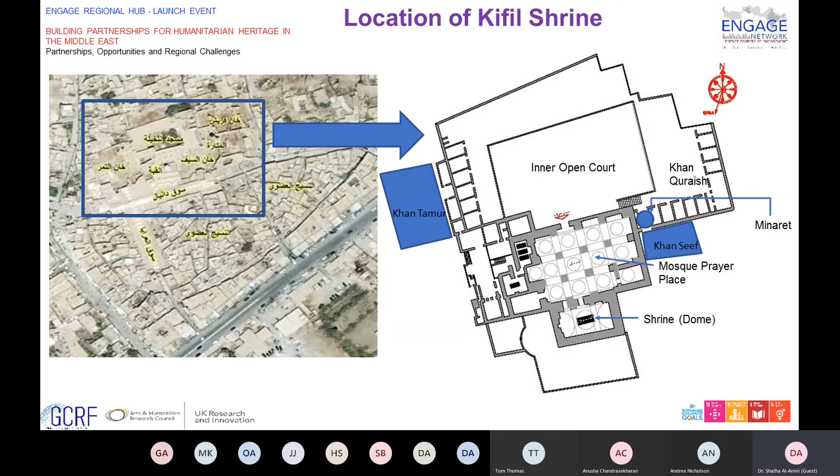From the figures below, we can understand the land use of the historical center of Kifl city, and we can recognize the age of the fabric with its elements, beside the legal consideration of all elements according to Iraqi heritage law.

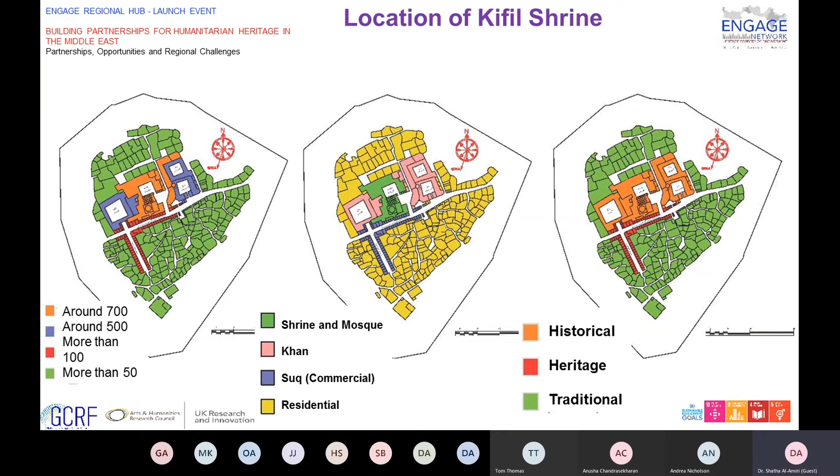The shrine dome. The oldest element was the dome above the shrine, around 700 years old. So it dates back to the Seljuk period.

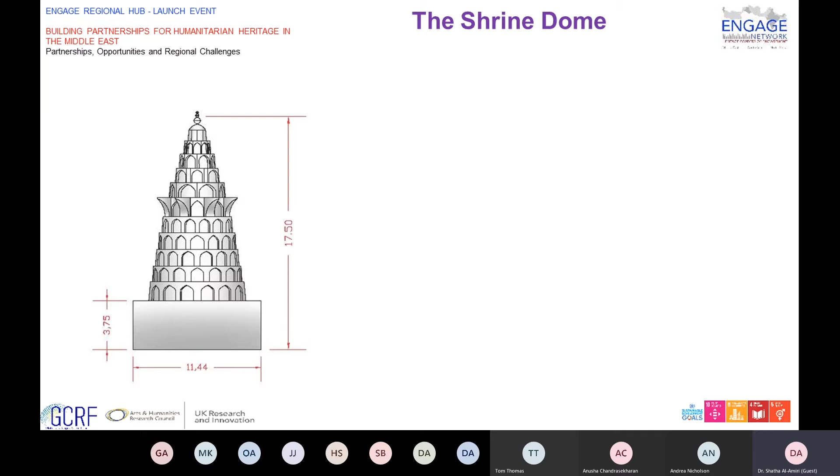A conical dome was built above the rectangular shrine. It was built of brick and plaster. The transition from rectangular shape to square shape was done by creating two consecutive arches, one of which was obtuse and the other was cut. All hanaya was established in the transition stage.

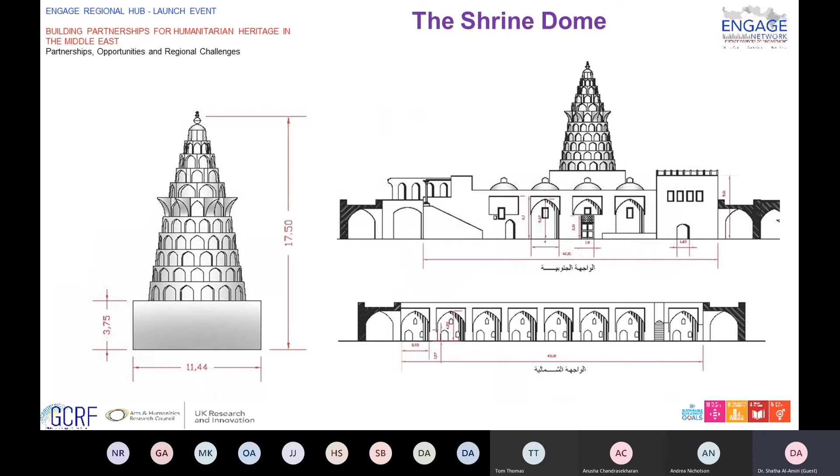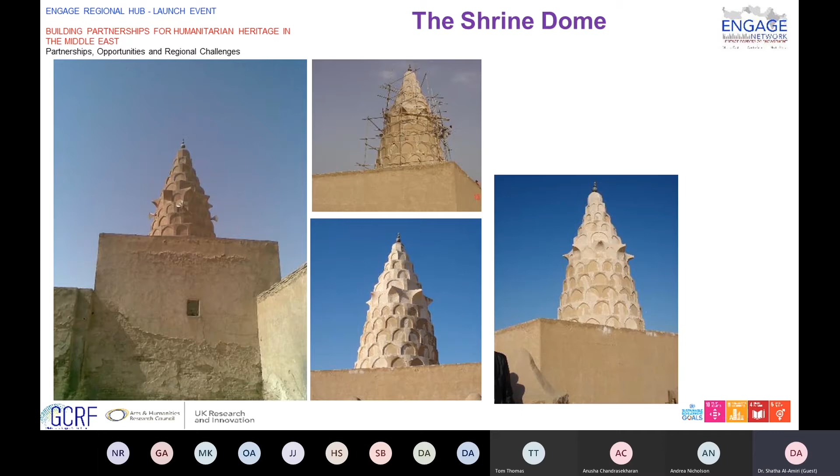The dome of the room has pointed arches. On top of it are three rows of small interconnected muqarnas. The uniqueness and rarity in the design of the dome give it an architectural value in addition to its archaeological value, which reaches more than 700 years.

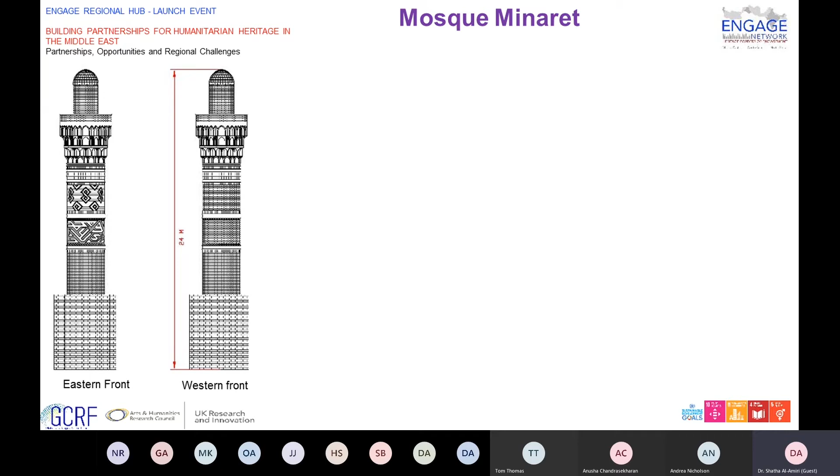The minaret stands near the shrine in one of the corners of the mosque from the inside. It was built with plaster and bricks. It's distinguished by its big height. It is 24 meters high, like the minaret of

Al-Khulafa Mosque. The minaret has a square base, on top of which stands a thick cylindrical body with a spiral stair inside it. Similar to the minarets of Baghdad, the cylindrical body ends with a balcony resting on four layers of muqarnas.

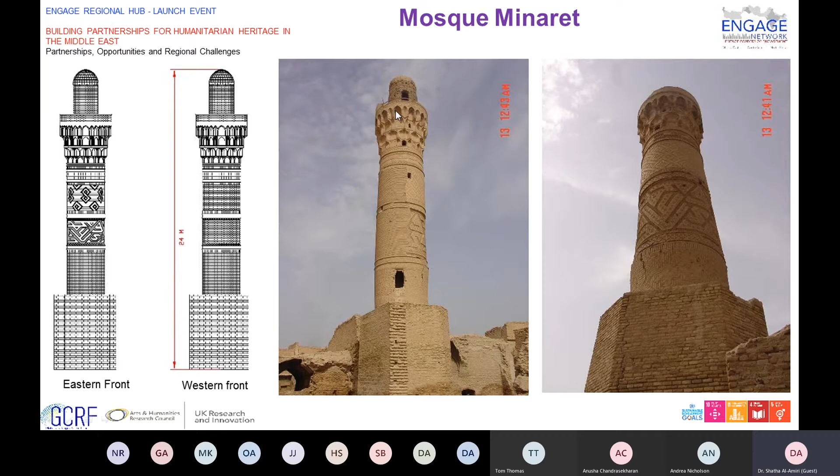This is the mosque minaret. The interior of the muqarnas is decorated with plant motifs and lettering decoration executed on bricks using a deep carving method, similar to the muqarnas decoration of the Khulafa Mosque. The body is decorated with lettering decoration and geometrical shapes constructed on brick using a deep carving method.

The neck of the minaret is relatively thick when compared to the minarets in Baghdad, which were built during the Abbasid era.

The link between the minaret and the khans is a juxtaposed functional relationship that affects the collective memory in the society and visitors. The khans beside the shrine are distinguished by their antiquity. They are estimated to be more than 500 years old.

So it was announced as a heritage site by the State Board of Antiquity and Heritage. Also, there is no clear identification of their age. It is named Khan Quraish, Khan Seef, and Khan Tamur.

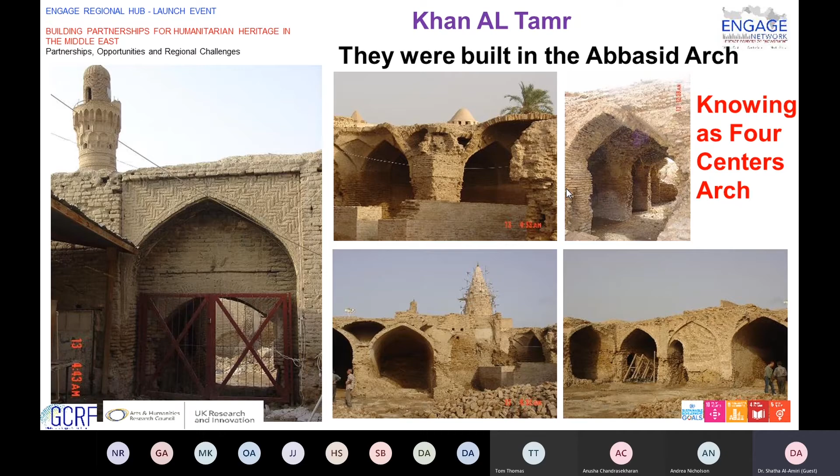This Khan Al Tamr was built with Abbasid arches, known as four-center arches. This also shows Khan Al Tamr, with opposite arches clear of decoration and muqarnas.

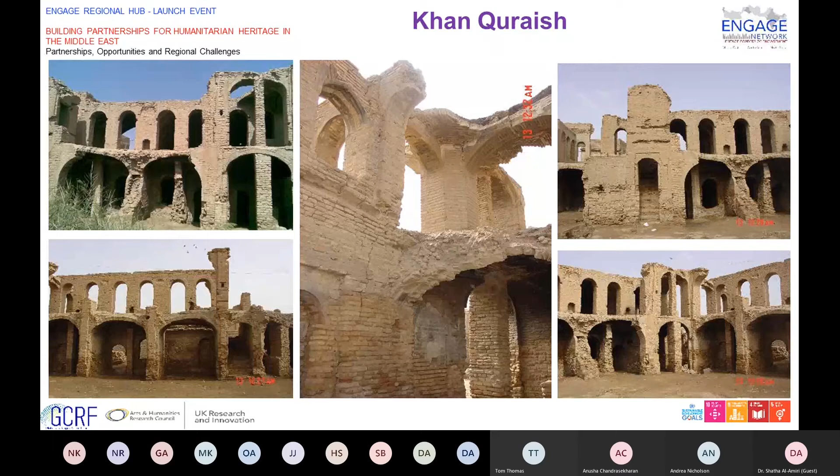This is Khan Quraish. Khan Quraish has a huge building with multiple floors. Also Khan Quraish, a huge building with a large area and many services.

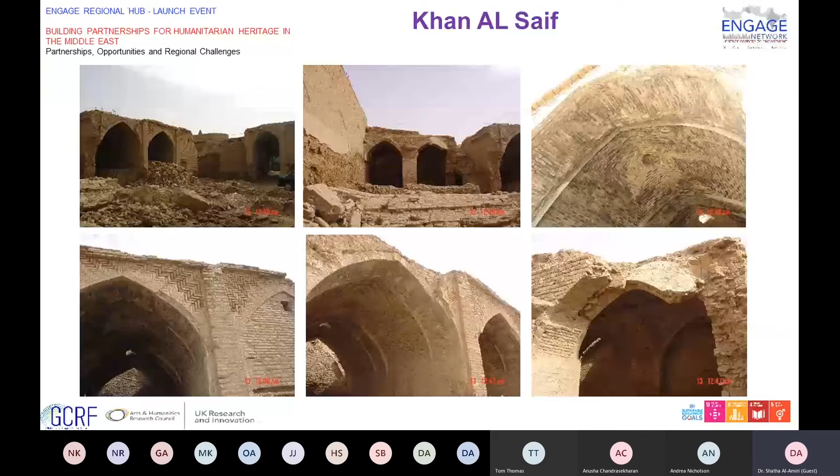This is Khan Al Saif. Bricks were paved during construction. Interior decoration features stucco plant decoration.

This is Suq Danyal, which is the newest component of the site's elements. Its commercial function is still present to this moment. It was established at the beginning of the last century, close to 100 years old.

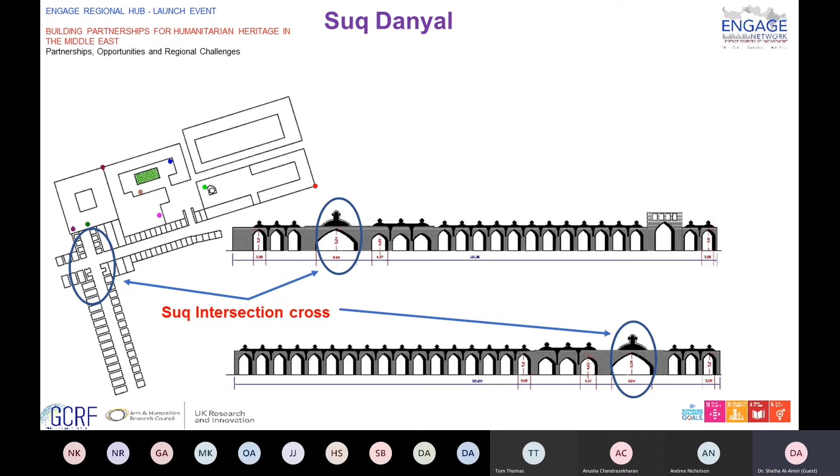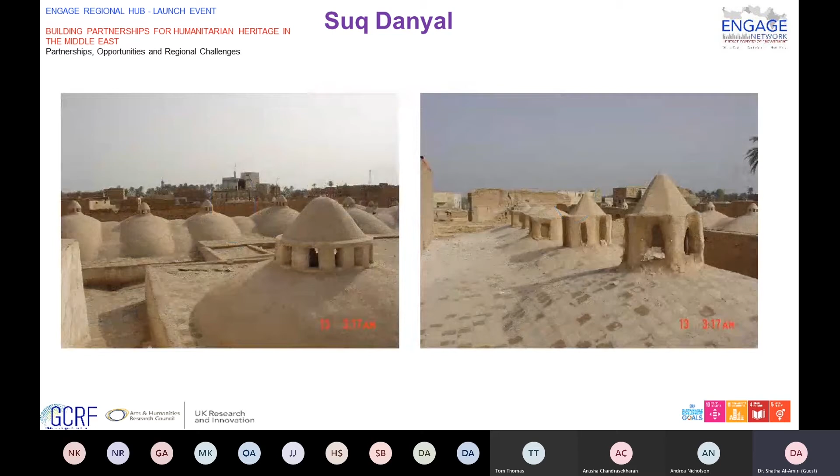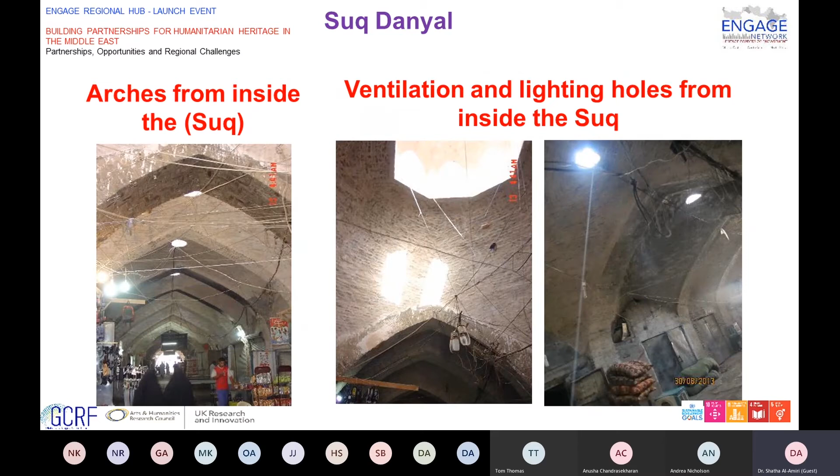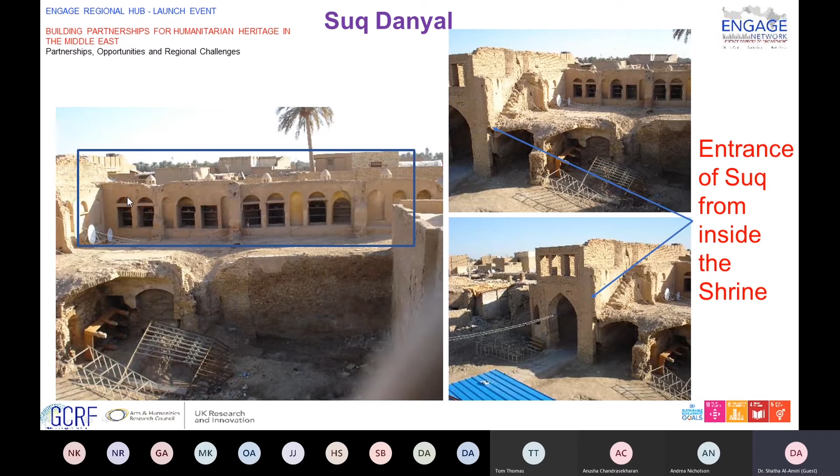Suq Danyal, Suq intersection cross. This is ventilation and lighting holes at the top of the souk. Arches from inside the souk, and ventilation and lighting holes from inside the souk. This is decay of structural condition in the souk and the entrance of the souk from inside the shrine.

What happened? This...

Responsibility for managing these sites belongs to the State Board of Antiquities and Heritage and the Real Estate Department of State, a shared government responsibility. The ability of each institution differs in experience, priority, and goal. All these reasons caused the engineering work on these locations to change in its features and lose many important elements and samples, affecting historical value, with an absence of responsibility for the offender and no extensive study on this topic.

Many parts were demolished, like the three khanat, and other parts were added, including a dome and two minarets of conflicting designs or inconsistent with the site, in addition to moving a group of symbolic graves in the site.

The site is important at the level of the collective memory of the city and its surroundings, and was a development pillar for the region. Also, economic activities were constructed around the shrine for many visitors to this place. So it has symbolism and significance at the level of different religions.

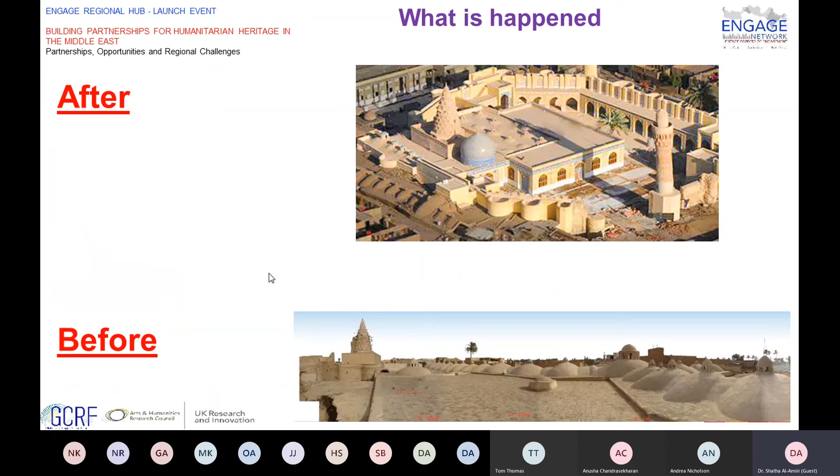Unjustified addition to the mosque that dominated the original elements. Two minarets were added, a copy from the old minaret, but in a smaller size.

This new decision doesn't have any historical or heritage reference. It is a purely subjective opinion, because most Iraqi mosques consist of only one minaret.

A dome has been added to the mosque's prayer mihrab, but it is not related to or close to the conical dome style.

The clarity of conical dome elements in the urban skyline compared to the confusion that occurred when adding another adjacent dome of a different style.

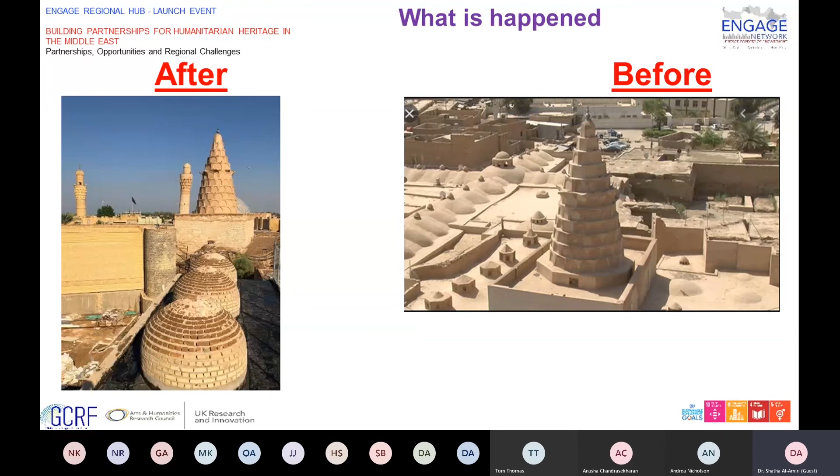The scene of the skyline is confused by the multiplicity of elements which do not belong to the urban scene, causing confusion in the collective impression of the recipient.

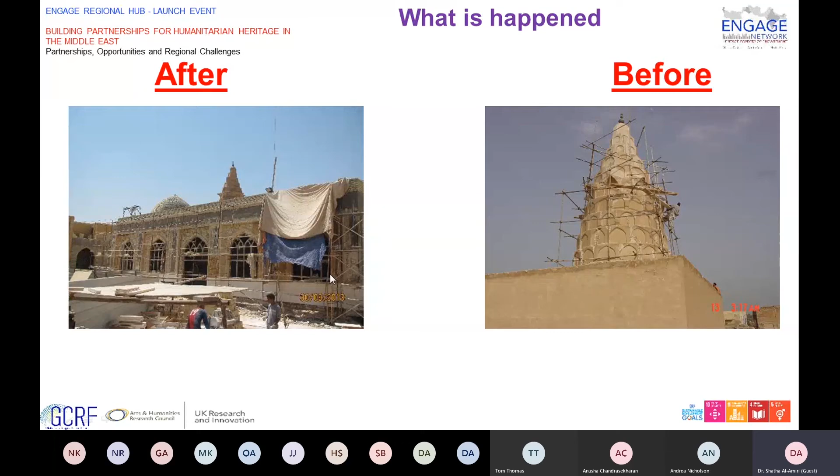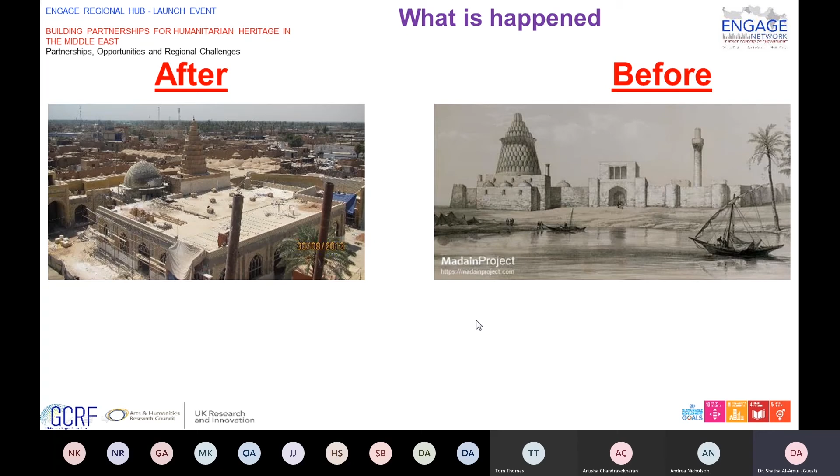The unacceptable expansion that absents the dome from view. There is originally no dome above the mihrab. Either there is no need to add another element that changes the scene of the site, or the addition must be according to a careful study within the context of the site.

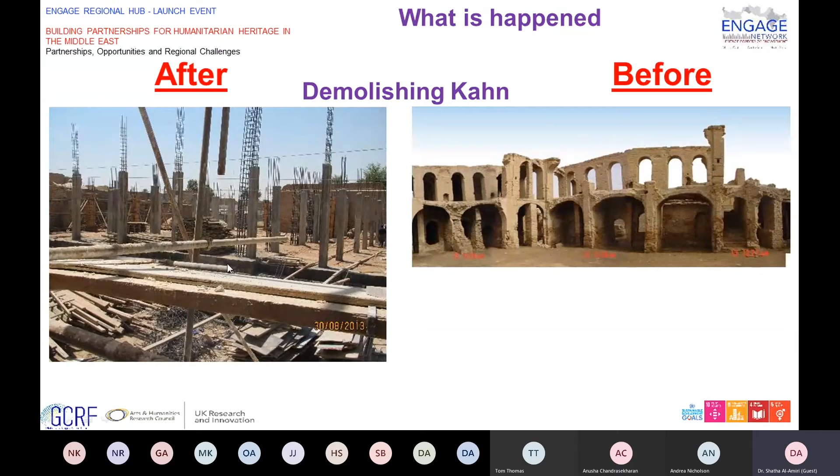Demolishing the Khan, despite it being announced as a heritage site, and converting the Khan site into services related to the mosque, is definitely a wrong decision.

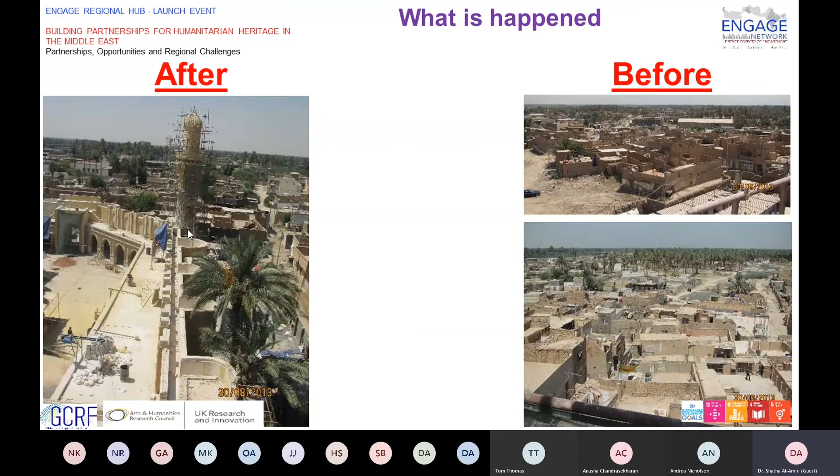The new dome was added in front of the historic conical dome, which dominated it. The enormity of scale of the new element is unsuitable with the human scale of the urban fabric based around the mosque.

Changing the entrance feature and losing its human scale. The roofing of the mosque's summer prayer space is a bold decision that changes the symbolism and spiritual impact of the space, along with changing the finish pattern for ventilation and lighting holes.

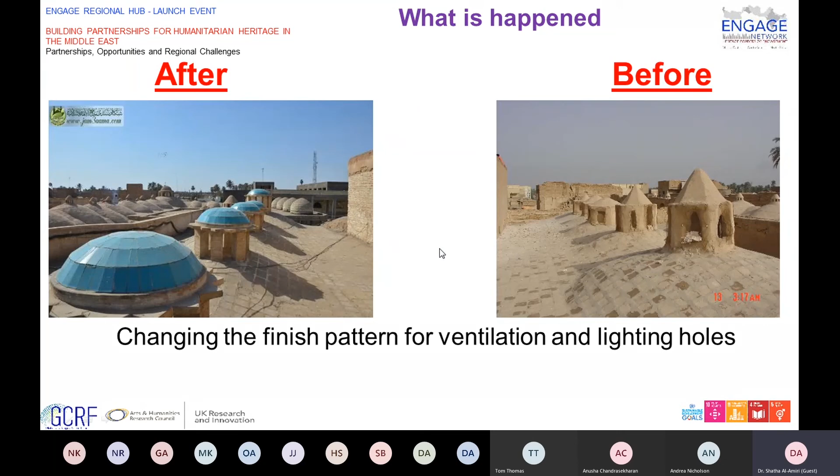The conical dome's interior finish has changed in style, transformed into a geometric brick decoration.

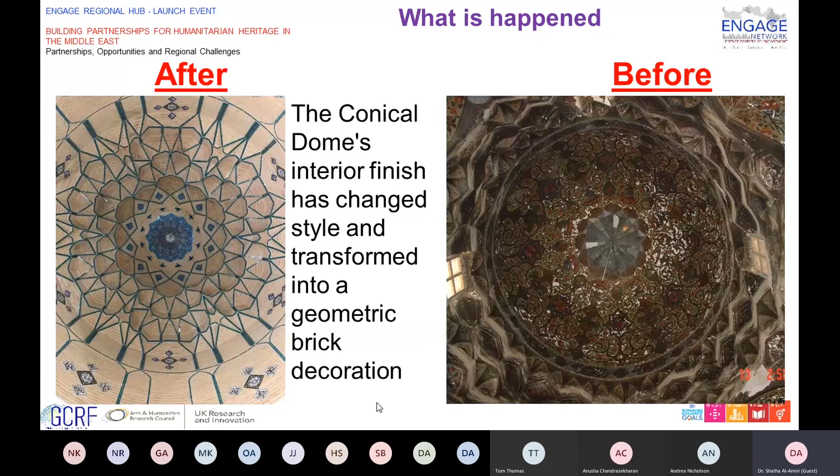Changing the locations of the graves of the prophets. These graves are mostly symbolic, but their locations also have a strong connection to this symbolism and can't be changed easily.

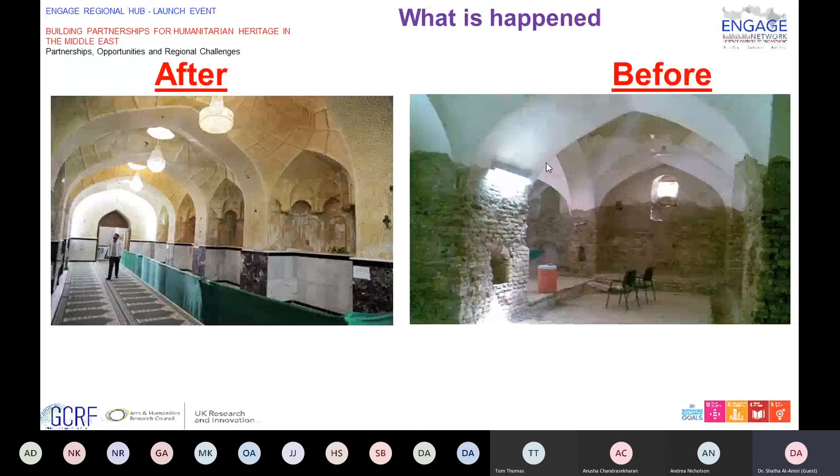It is noticed that the interior decorations were plant stucco decoration, and they have been replaced by geometrical brickwork. Interior additions to the vault and arches are now covered by geometric decoration made of brick.

Geometric inscription and ornament in bricks instead of the stucco ornamentation and non-engraved arches.

Not depending on local craftsmen in completing construction work and engraving, so the addition is conflicting and non-harmonic.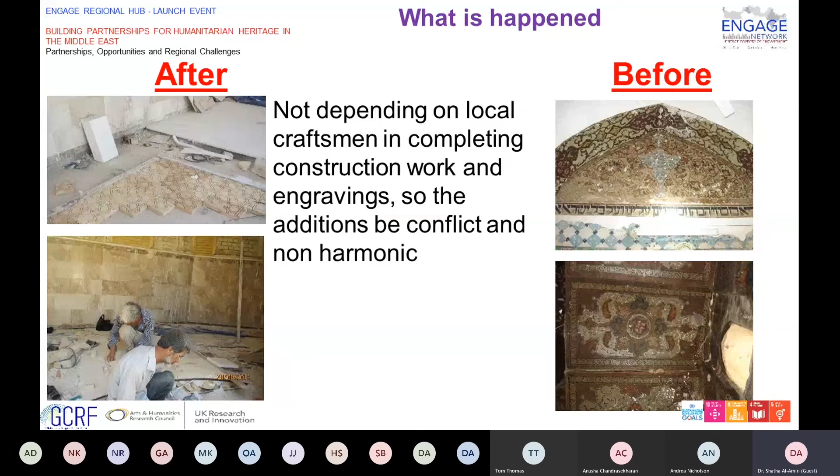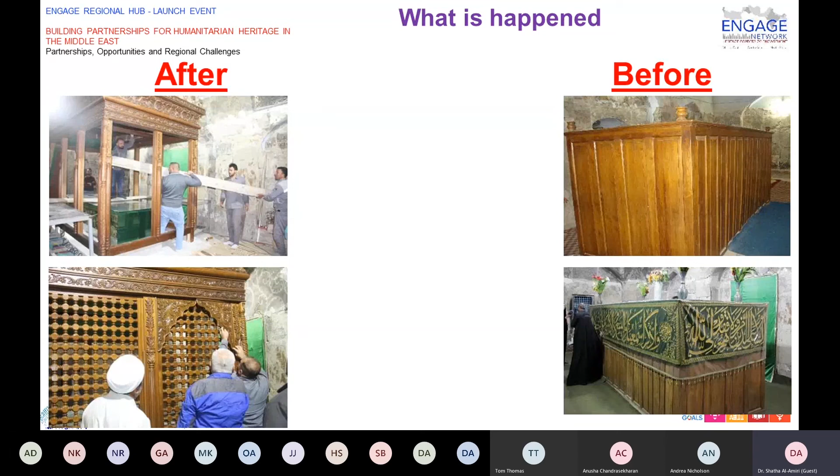Adding strange material in the finishing of the mosque and the shrine, such as marble and granite, and changing the shrine box to another one with a completely different design, is also a wrong decision because it is linked to the symbolism of another religion.

Neglecting the restoration of Souk Daniel, the structural impact of construction work on Souk Daniel caused deterioration and collapse in several parts of it.

It is believed that this was intended in order to take advantage of the space of the Souk, noting that the site is declared as heritage and registered with the General Directorate of Antiquity and Heritage.

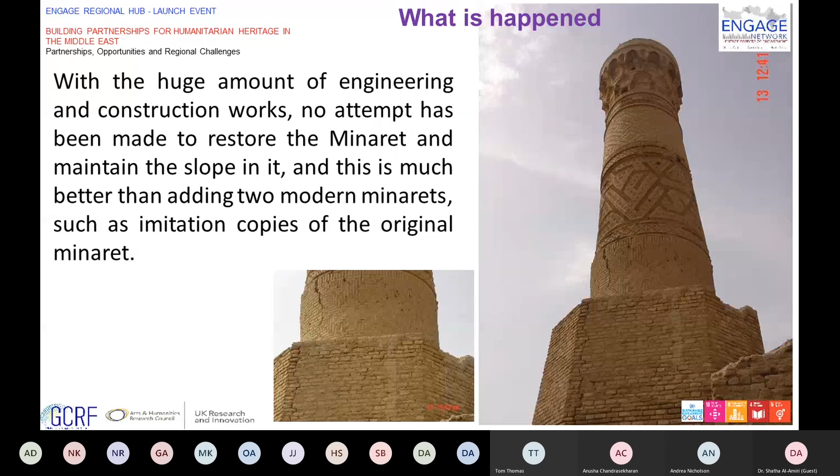With the huge amount of engineering and construction work, no attempt has been made to restore the minaret and maintain its slope. This would be much better than adding two modern minarets as imitation copies of the original minaret. Unfortunately, another conical dome in Baghdad is currently suffering the same problem.

The Abbasid dome of Sheikh Omar Suhrawardi belongs to the administration of the Sunni endowment. It is responsible for financial matters and for managing the site, but it doesn't have the technical experts required for that.

While the Board of Antiquity and Heritage is responsible for protecting and preserving the site, it doesn't have the authority to interfere with the site.

This could be under the responsibility of UNESCO, in the absence of the ability to place all these sites under one authority. Thank you so much for listening, and over to you.